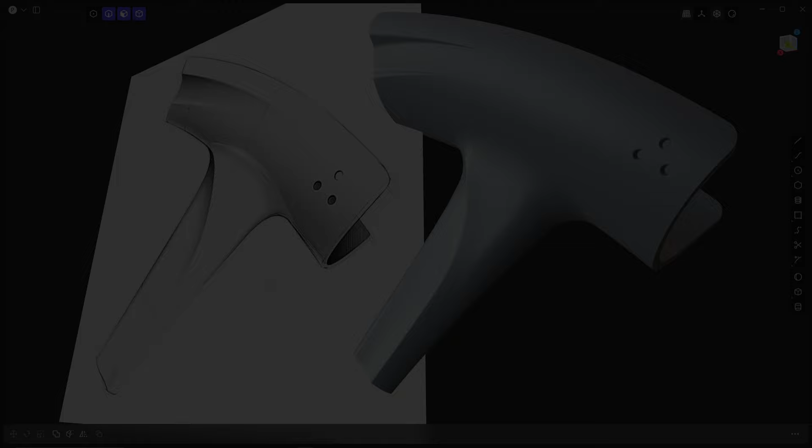Today, we're going to delve into the world of shapes and explore this particularly tricky one. This shape has a wonderfully rounded top that adds a touch of sweetness to its overall appearance. However, things get a bit tricky when we encounter an indentation, which is formed by two hard edges right here. But wait, there's more. We also have a challenging hard edge that starts from this point of tangency and extends all the way down here.

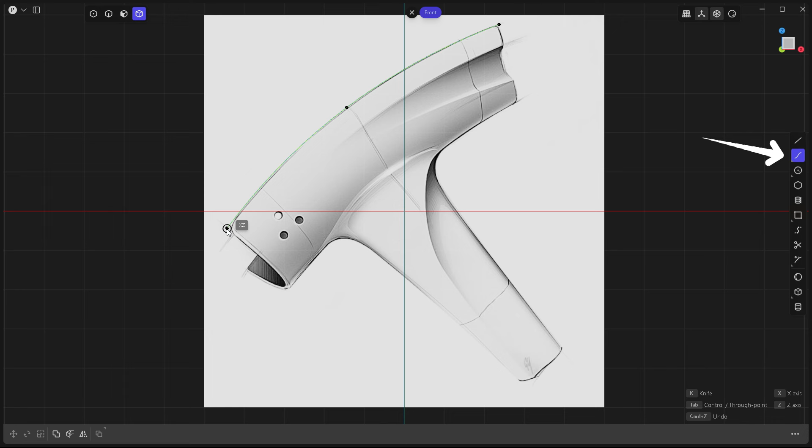This means we're dealing with two different cross sections, one up here and another down here, and they have slightly different shapes. Now that we've set the stage, let's dive right into the nitty-gritty details of this shape. As I always say, let's keep it simple. And by simple, I mean just 3 points to define this curve. Use the Spline curve tool, guys. Right-click to confirm. Don't forget to adjust the points by clicking and dragging them.

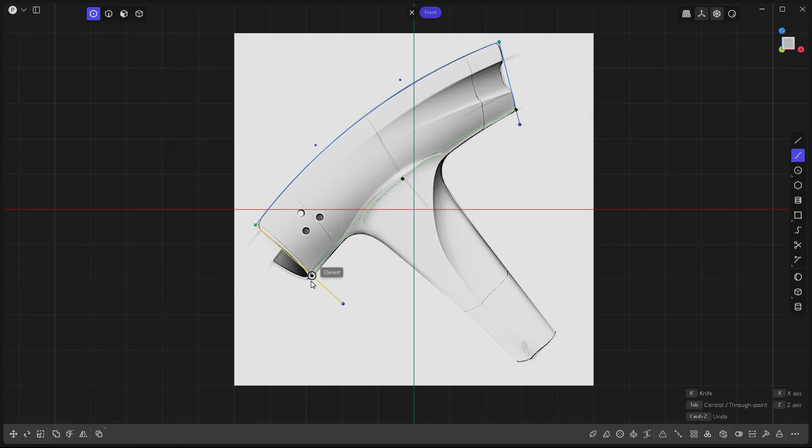To facilitate the creation of the other spline, we can start by drawing two simple lines as guides. Once we have completed the spline, we can then delete these lines. Let's lay down the spline, snap it on the lines. Make sure the spline is aligned with the image. Okay, let's delete these lines.

Alright, let's keep the momentum going. Now, I'll shift the curve at the top 2 units to the left, and then mirror it along the y-axis. To activate the mirror tool, you can either press Alt+X or simply click on the corresponding button in the toolbar. Once that's done, go ahead and click on the green axis.

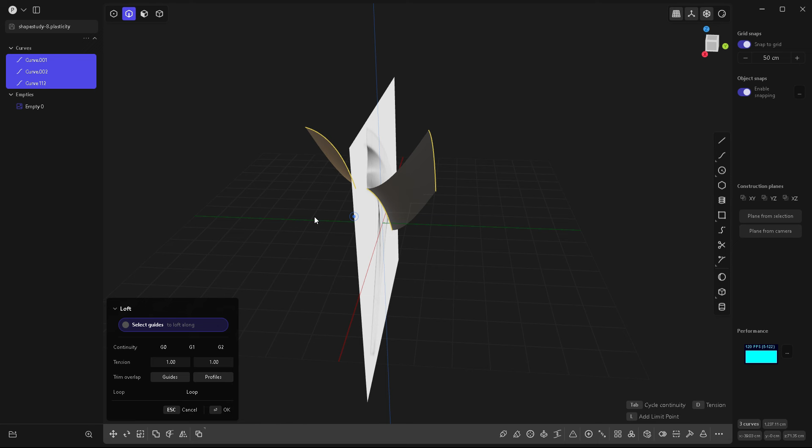Alright, so if you're thinking about selecting the 3 curves and pressing the L key to loft them, I would advise against it. We don't want to end up with this pointy shape. Instead of that, what we really need is tangency on both sides. To achieve that, all we have to do is select the 2 curves at the top, then press the I key and extrude them along the Z-axis.

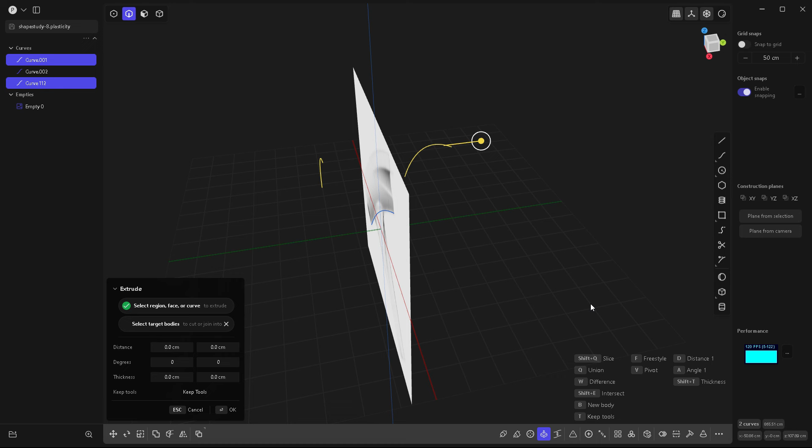To begin, select both curves and press the I key. Next, press the F key to extrude them along any axis that suits your requirements. In this case, I will click on the Z-axis and extrude them slightly. This action ensures that tangency is achieved at the connection points of these 2 curves. You can now remove the curves. Instead, we will utilize the surfaces that have just been created to perform a proper lofting technique with G1 continuity.

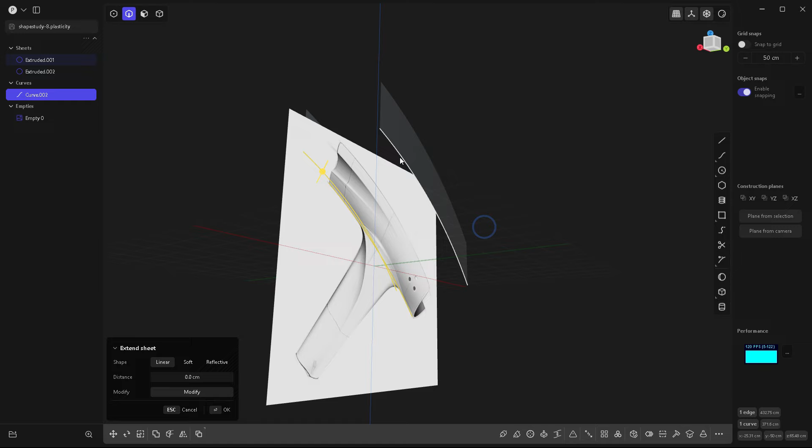Okay, here's what you need to do. First, select this edge, then, with the Shift key pressed, select the curve, and finally pick the edge on the opposite side. Once you've done that, simply press the L key. This is something else, guys, right?

Now, we need to split the spline at the points of tangency. These 2 points here. Grab the Split Curve tool and click on both points. Make the cut exactly where the sketch intersects the curve. Next, press Alt+J to unjoin the curves. You can now delete the curve in the middle.

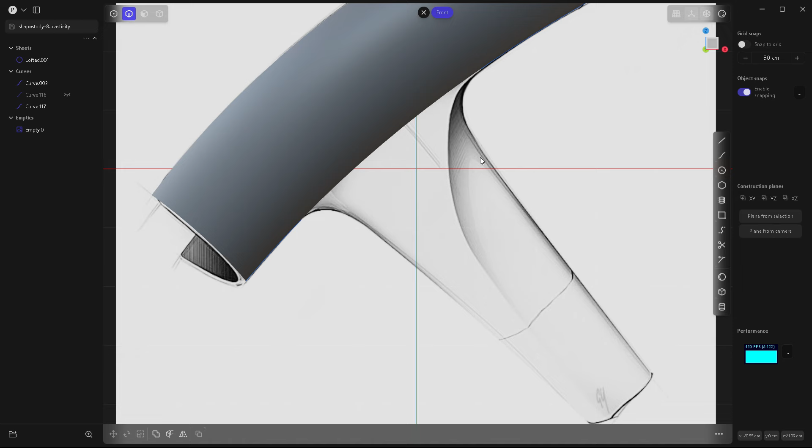Alright, now let's move on to the next step, which involves establishing tangency between these 2 points and the other 2 points on the opposite side. There are 2 methods we can use for this. The first one is to utilize the tangent circle tool. Alternatively, we can select the 2 points and press the L key, then set the start curve and end curve to G1. So to start off, let's create a spline here and one on the opposite side.

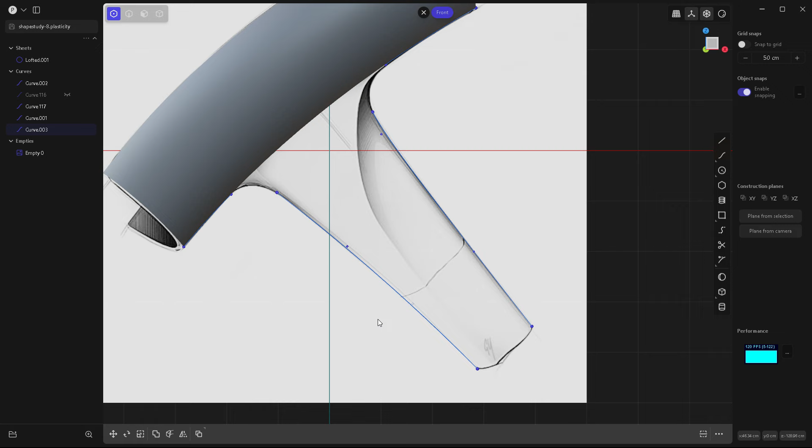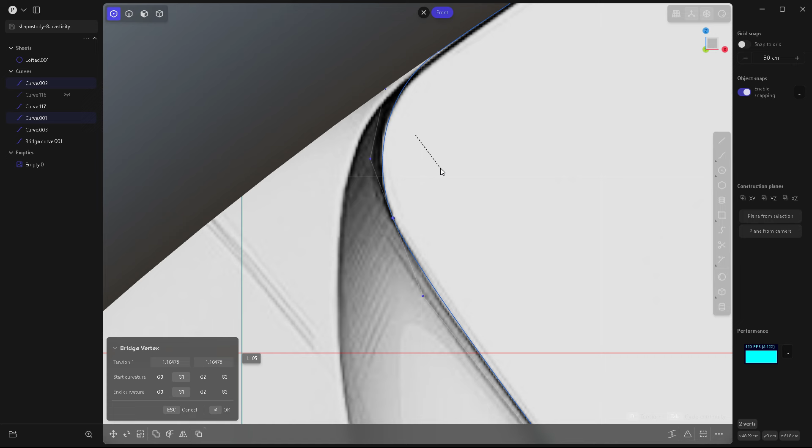I could even use the bridge curve tool, guys, but let's simply select the points and hit L on the keyboard. This action makes sure that tangency is achieved at the connection points. You can now select the curves and press the J key to join them.

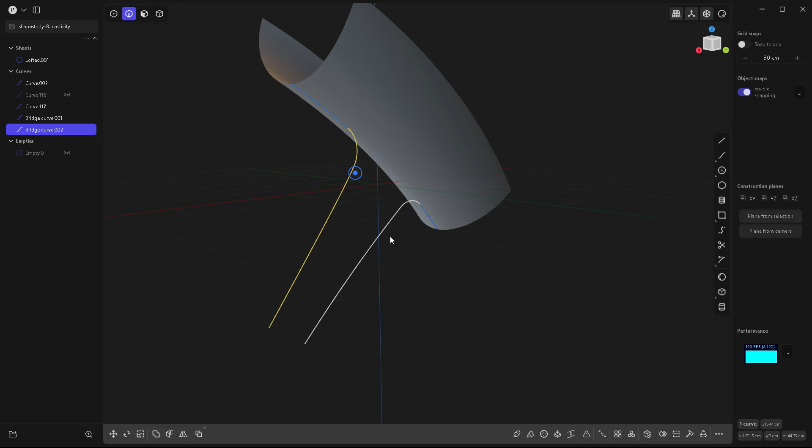To create an arc that snaps on the points of tangency, we will use the 3 points arc tool. Before we proceed, let's right-click on the material icon and select Show Faces. This will allow us to visualize the wireframe, giving us a transparent view.

Let's create this arc. To create a 3-point arc, simply hold down the left mouse button here. From the list of options, choose 3 points arc. This tool requires you to select 3 points. Start with the first point, like this. Then, choose the second point to define the diameter. Finally, select the third point.

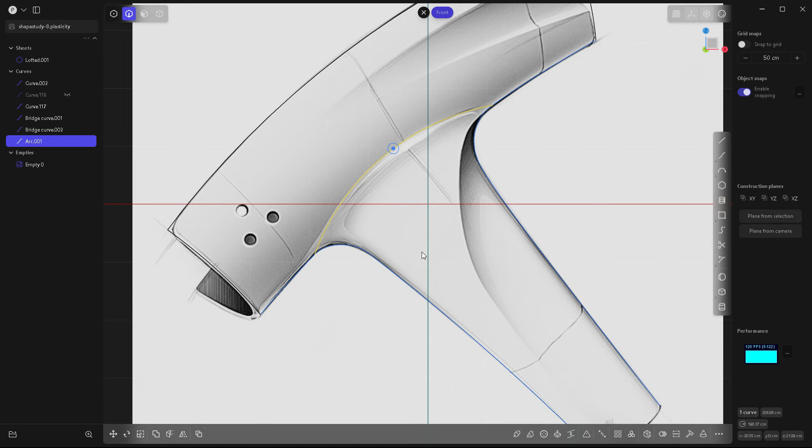OK, click on Show Faces again. To utilize the newly created arc, just press the C key. This will bring up the requester, which is searching for a target model to cut. All you have to do is select your model, right-click to confirm, and delete the cut section.

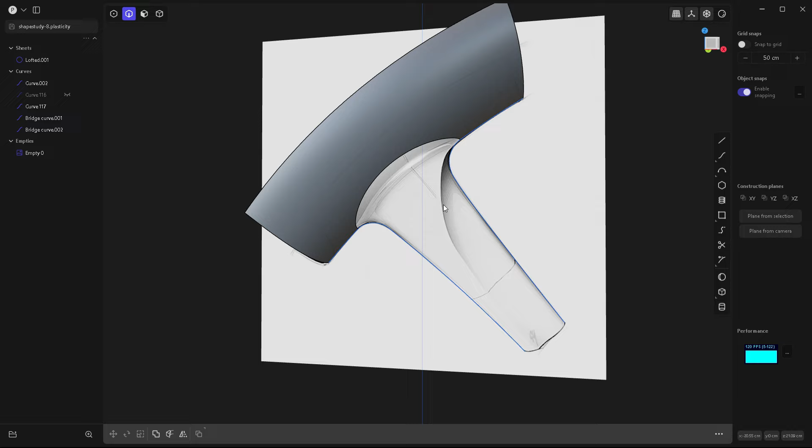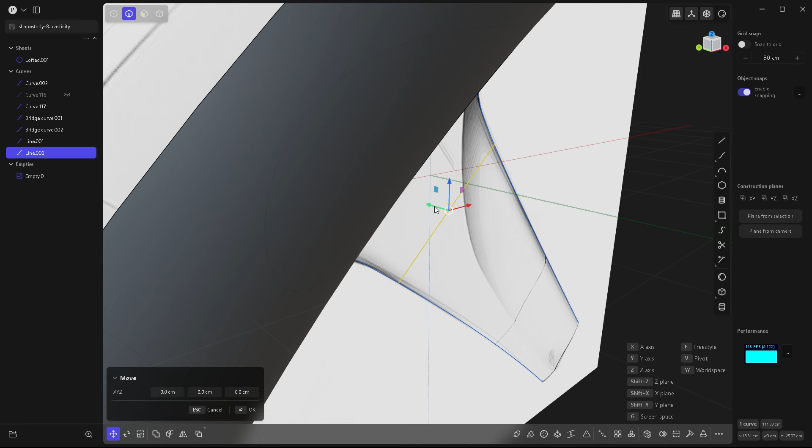Alright, now I'm going to create a plane where I can sketch my cross-section using the technique we've learned in the previous tutorials. We just need to create a line intersecting the 2 splines. Next, press Shift plus D to duplicate it, move it a bit to the right, and mirror it. Finally, select both lines and press L key to loft between them.

Let's create a simple oval using the 2-point circle. Sorry, a simple circle, but the shape we will end up with is more like a capsule. Then, with the line tool, create two tangent lines. Hover over the curve till the tangency snap appears on the screen, then right-click to confirm.

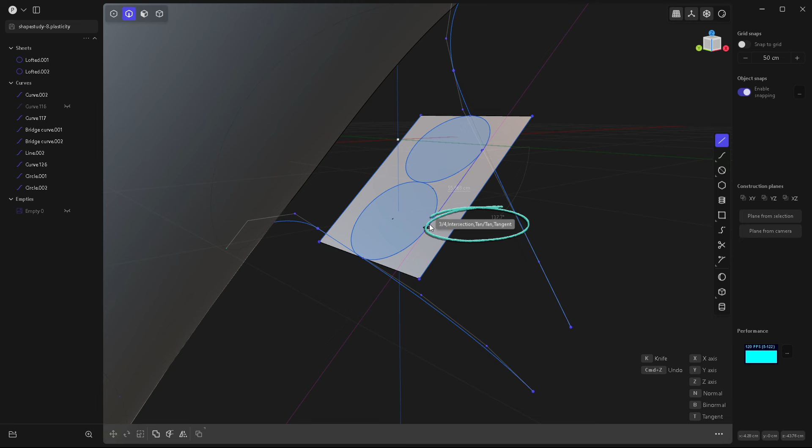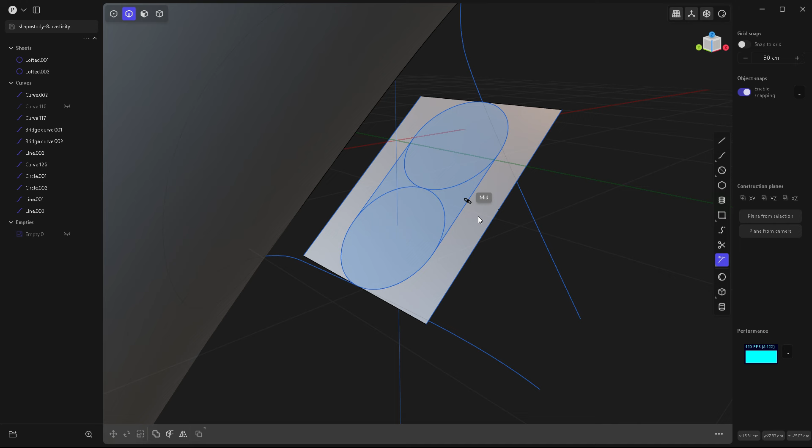If you want to split the circles at the points of tangency, one option is to utilize the Split Curve tool. After selecting this tool, you can left-click on the points of tangency and press the Alt+J key to unjoin the circles. Another option is to use the Trim tool, which allows you to remove unwanted parts of the circles. To do this, click on the Trim tool, then simply hover over the circles and left-click on the areas you wish to delete. Now select the curves and press J to join them.

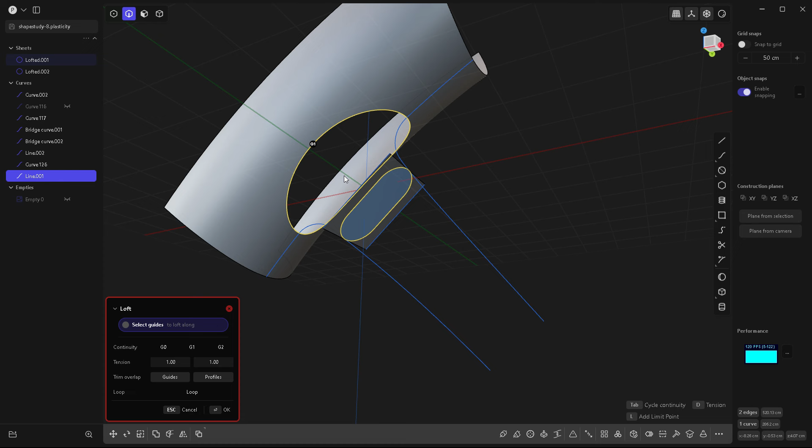If you try to select the upper edge and the newly created section and then press the L key, you'll be disappointed. The Loft tool can't handle the complexity of the edge. But don't worry, there's a solution. We just need to give Plasticity some extra information and let it know which direction we want the surface to go in. To achieve that, press Ctrl+R key.

This will activate the Isoparam tool. Press the Tab key to switch between horizontal or vertical. Snap the new edge right in the middle by hovering over the edge at the top, and left mouse click. We can delete the plane and curves too.

Grab the Line tool and create a line similar to this one. Start from the middle of the section and extend it all the way down in the binormal direction. The binormal vector is a special vector that is perpendicular to both the tangent vector and the normal vector.

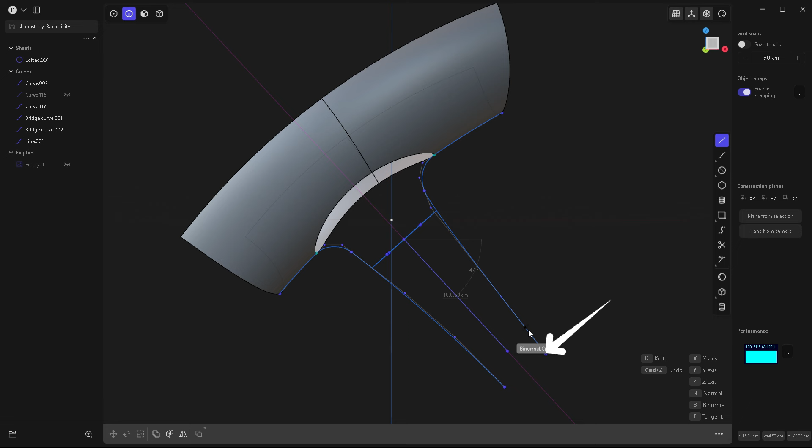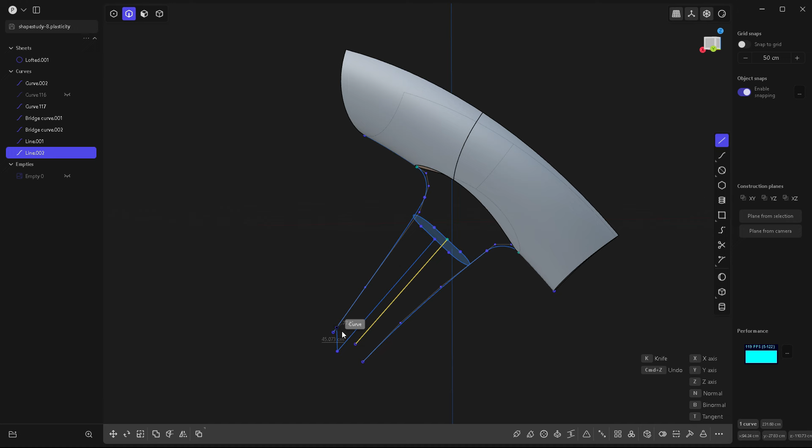To snap exactly at this point, hold down the Shift key and hover over the adjacent line. Then, go down to this point and left-click on it. Finally, right-click to confirm. Do the same on the opposite side. Make sure the points are greenish, guys. This tells you that the connection is perfect.

Let's now select both edges and press Shift+D to generate curves out of edges. Now let's move on to the next step where we will connect this point to the one above it, following the rule of tangency, alright?

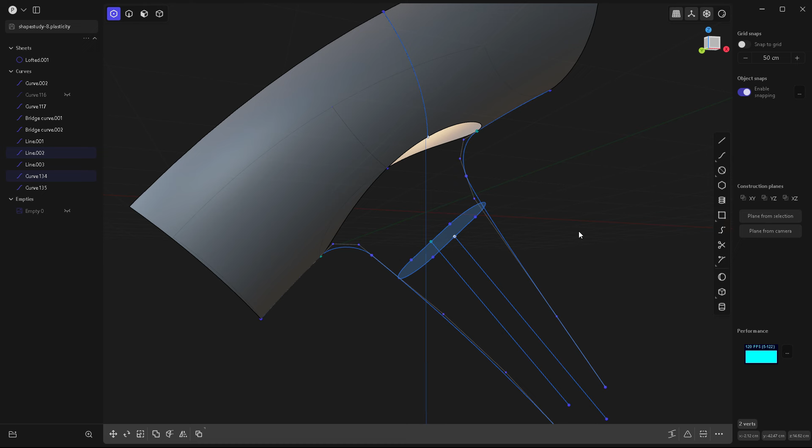Now grab the Spline tool and create a simple curve at the bottom. It's a temporary solution. Make sure to close the curve accurately. Creating another one in the middle might be necessary.

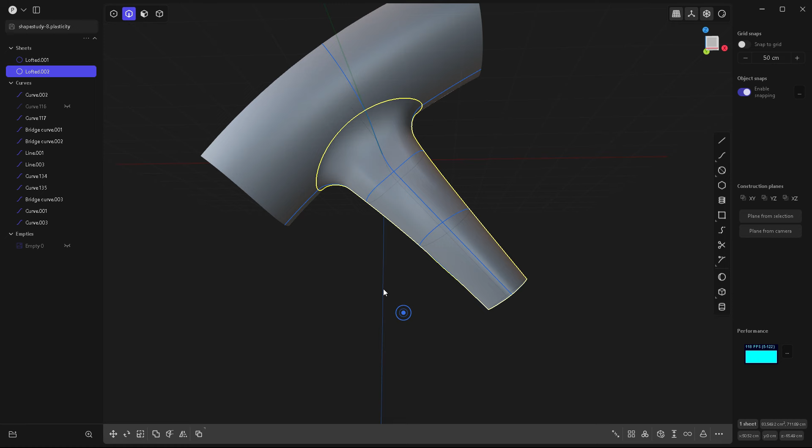To tackle the challenging middle section, we'll begin by using the Control Point Curve tool. Lay down a curve, ensuring that the second point is tangent to the first one. Start by placing the first point right here. Then, snap onto the purple tangent line and position the second point. This is how you achieve tangency in this particular point.

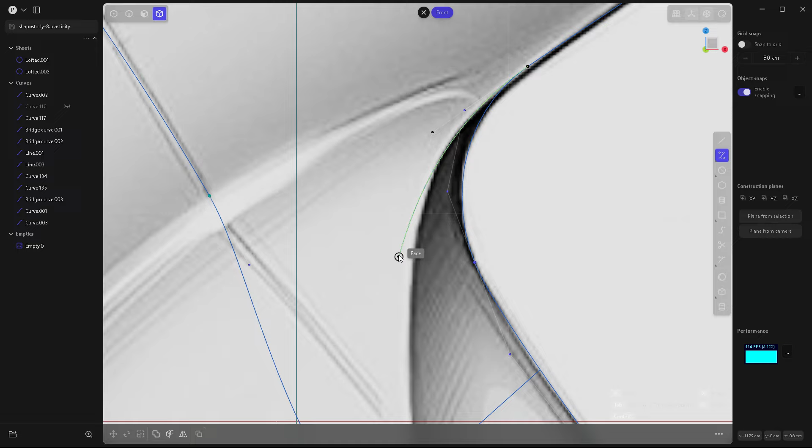To continue, just keep placing control points. Aim for maximum precision here.

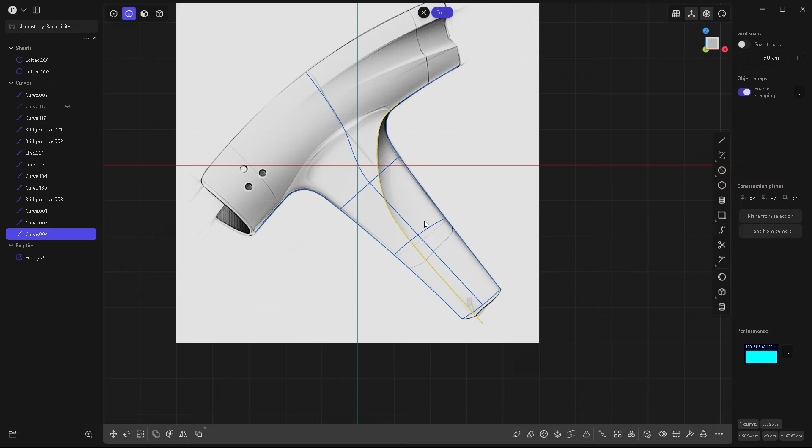Now with the curve selected, press the C key. Next, select the model to cut it. Delete the part that you don't need, this one. You can now delete the section at the bottom.

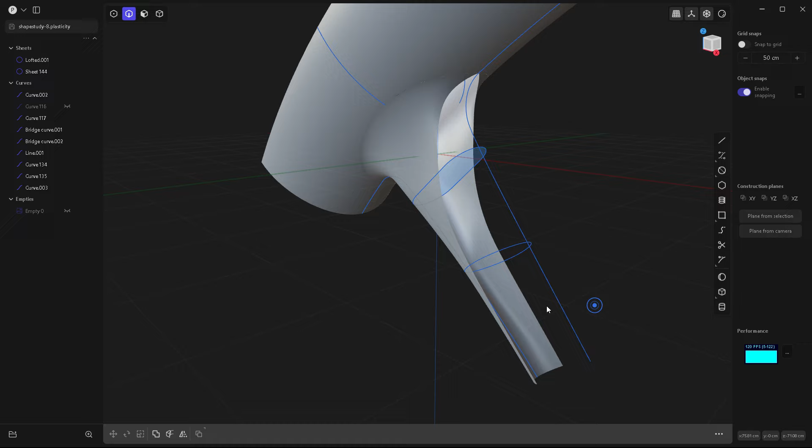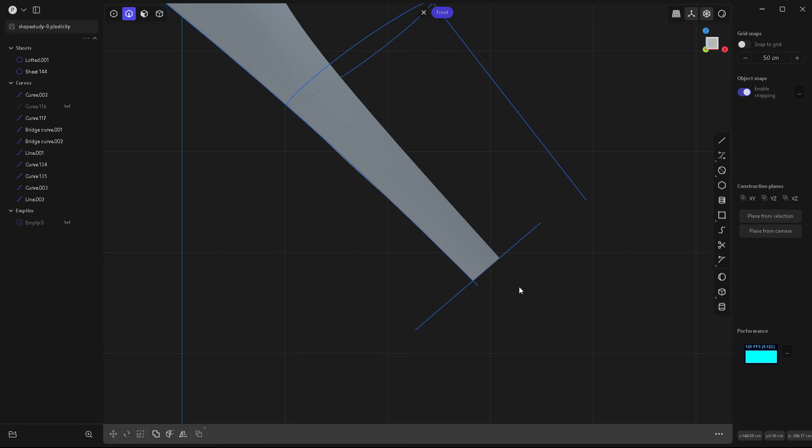And the two guides as well. There may be some issues that arise from these fragmented edges. However, I have a solution. I will simply cut it with a clean, straight line. By taking this action, we can achieve a nice, seamless, single edge. There we have it.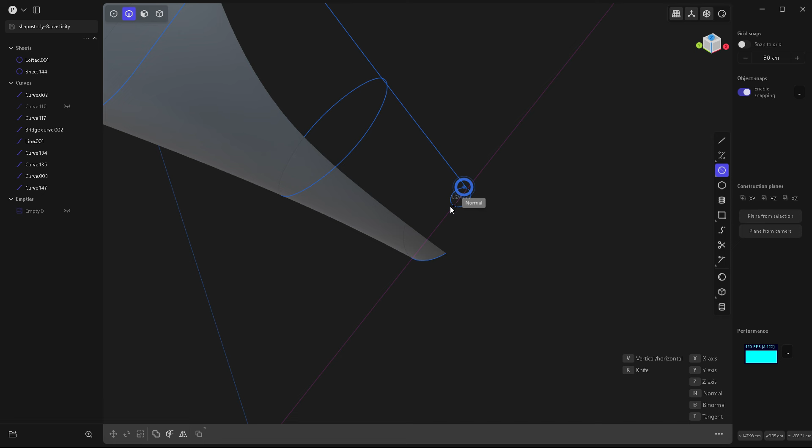Now press Shift plus D to generate a curve. Next, grab the 2-point circle and create one, like this. Snap your mouse cursor along the purple normal direction. To divide the circle in the middle, simply use the line tool. Once that's done, you can easily get rid of half of the circle by using the trim tool.

To achieve a seamless transition between the points, it is important to have G1 at this connection and G0 at the other. This is necessary in order to maintain the desired hard edge at this connection. That's the shape you should get. Select them and press the J key.

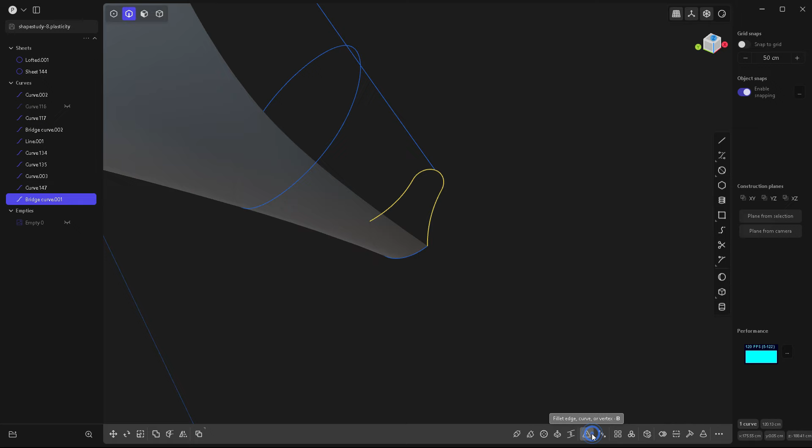Alright, let's go ahead and select the edges and then press Shift plus D to create the curves. I will not loft using the edges, as I'm not interested in achieving tangency in this case. Remember, we need to have G0 here. Don't worry, we can always bevel these edges later on.

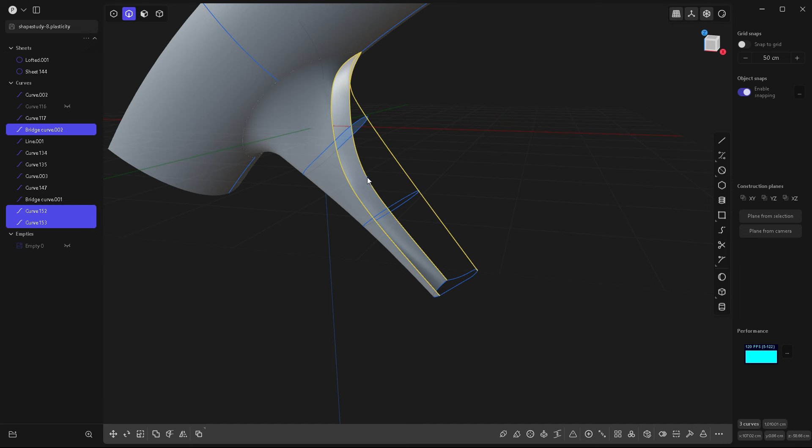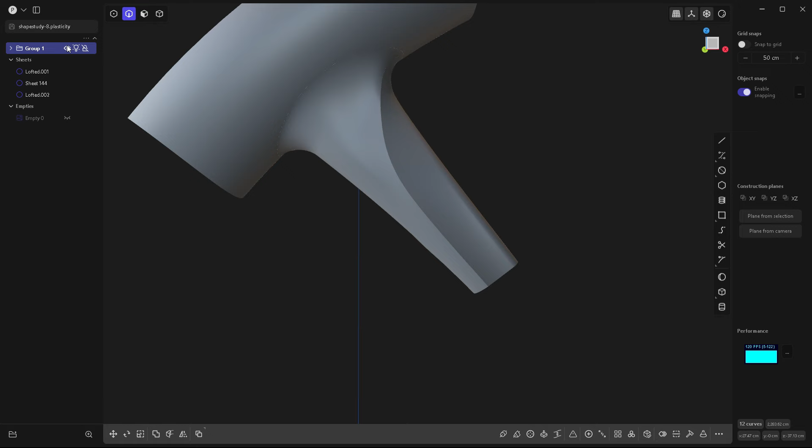Now select the curves in a clockwise or counterclockwise circle and press L. Finally, hold down the Shift key and pick the shape at the bottom, and there we have it. Lovely. Let's do a little bit of housekeeping by grouping all the curves in a folder by pressing Ctrl plus G. I feel like the need to trim the bottom, don't you? Well, grab the line tool and let's do that.

Now, let's move on to the next challenge, dealing with the indentation. To accomplish this, I will be using 2 splines and imprinting them onto the surface using the imprint command.

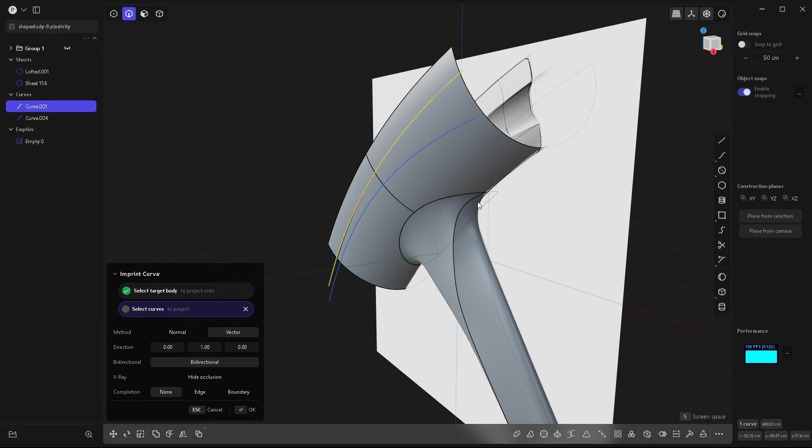Move the splines away from the center in the perspective view. Then imprint them onto the model, one by one. To find the imprint command, press the F key and type imprint in the input text field. To recap, select the spline, invoke the imprint command, and then select the model, and right-click to confirm. Okay, get rid of the splines.

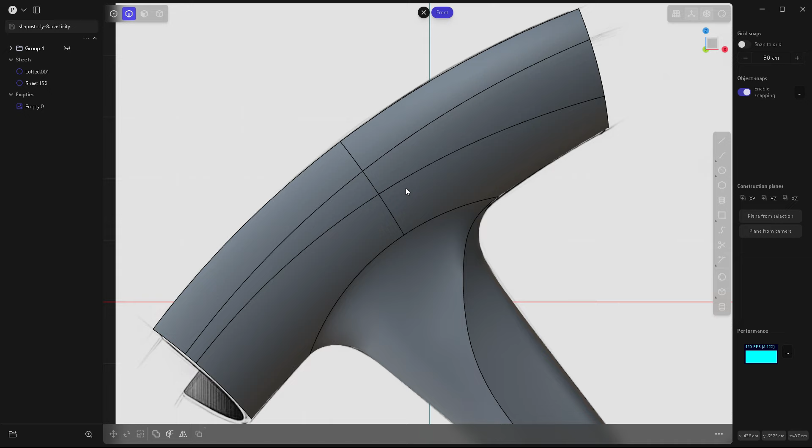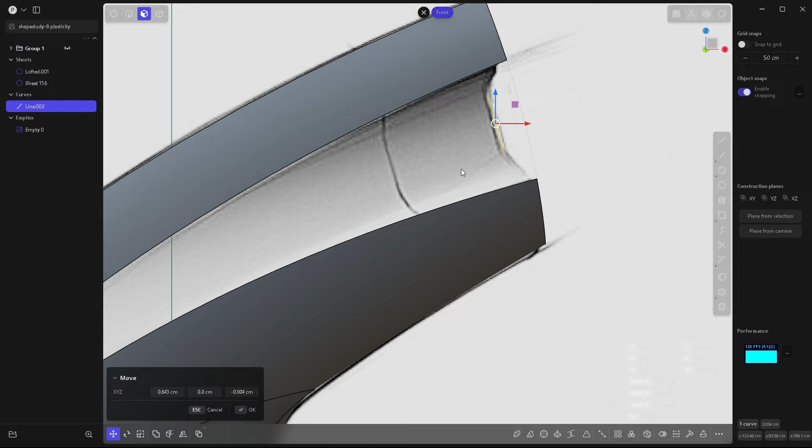Moving on, deleting this face. Next, let's create a tiny curve like this. Move it to the left and place it as close as possible to our surface. We will have to rotate it a bit and do a bit of guessing work just like that. You can rotate it, however, don't move it.

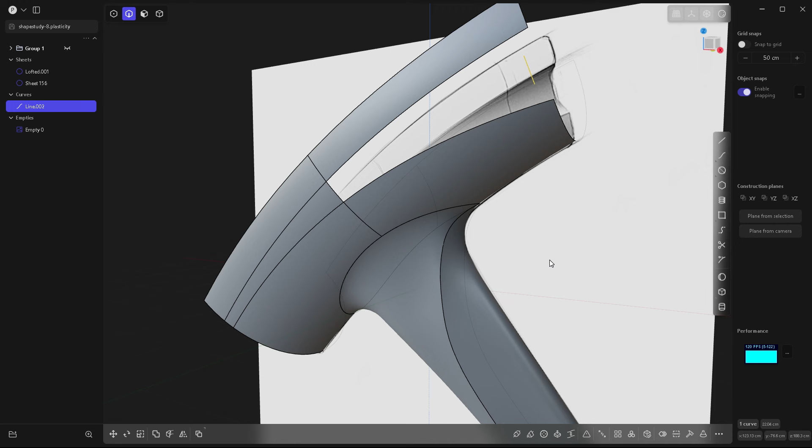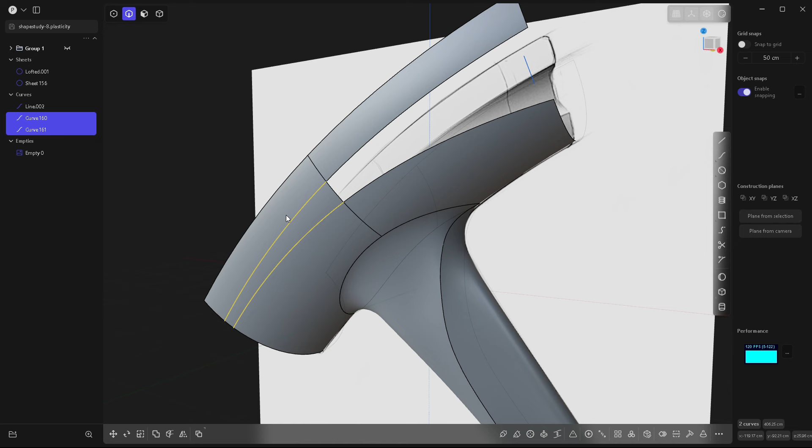To proceed, we need to connect these 4 points. This will allow us to achieve G1 tangency at these 2 points, while maintaining G0 at the other 2. Let's select both edges and press Shift+D. This will provide us with curves. First, select all 3 curves and isolate them. Then, simply loft between the control points. Make sure to set G1 continuity on the left and G0 on the right.

Now loft between the edge and the tiny curve. This will give us G1. Hold down the Shift key and pick up the guides. And there you have it. Now I can decide whether to use G1 or G0. It doesn't really matter, guys, because I'm going to bevel these edges. So we can just keep it at G0.

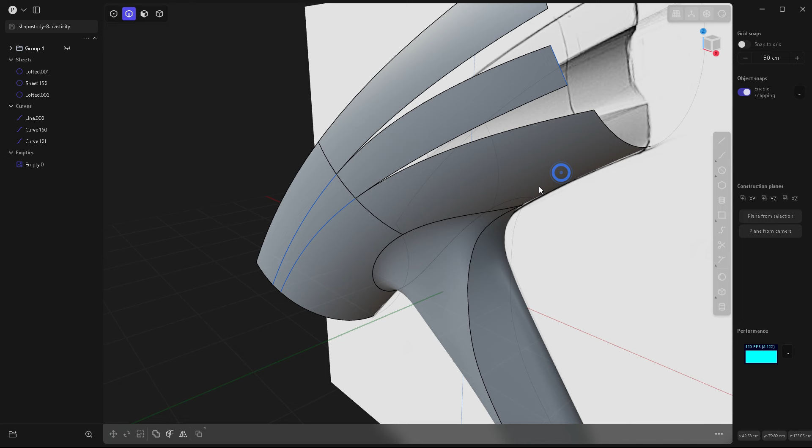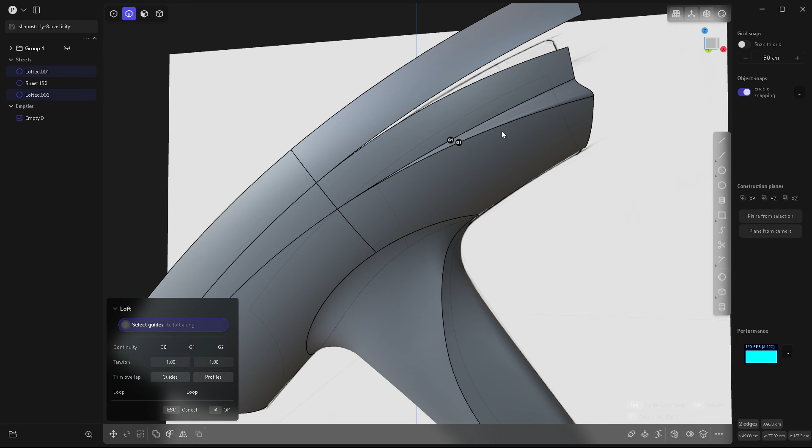Delete the curves and loft between the edges. As you can observe, Plasticity is giving G1. However, at this point, I'm not really a fan of how the edges blend in. To ensure a smooth transition between points, I will now demonstrate how you can effectively make those points flow seamlessly. Let's set it to G0. By following this approach, we will arrive at a series of interconnected points. Consequently, we won't be able to fillet the edges properly. Select the newly created sheets and press the J key to join them all.

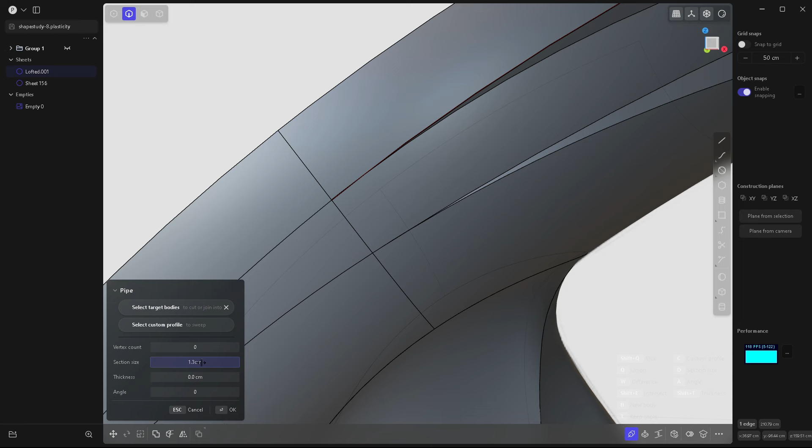I've been recently asked, how do you fillet those edges? Well, I set it to G0 just to answer that question. There are a few ways to do that. You can achieve it using the pipe tool. Select the edge, as shown in the video. Then press the P key, type 1.3 centimeters in the input text. Before confirming the operation, press the B key. This will give you a standalone pipe.

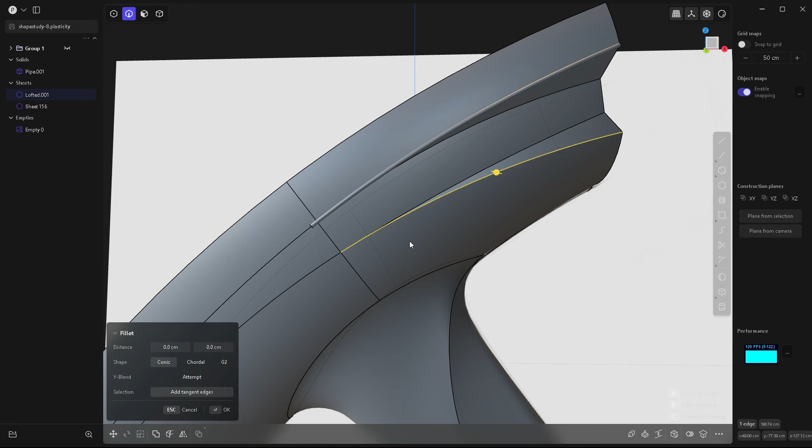Next, select this face and move it a bit, to prevent any confusion or congestion at the intersection. You have to do the same with the other side of the pipe, but let's go ahead without doing it, just to show you what's going to happen. Okay, let's get the other pipe. Give it the same diameter, and press the B key.

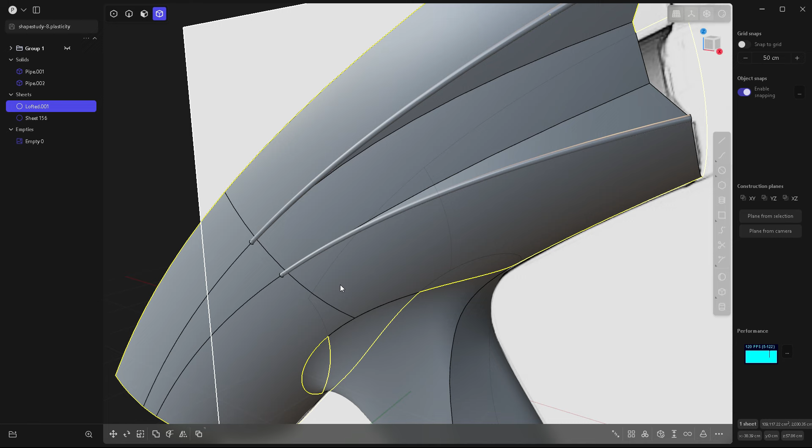Moving on, subtracting the pipes using the Boolean tool. First select the model, next press the Q key, and then select the pipes by holding down the Shift key. And there we have it. Okay, now you can see the issue right here. I should have moved this face of the pipe as well. Okay guys, let's undo that.

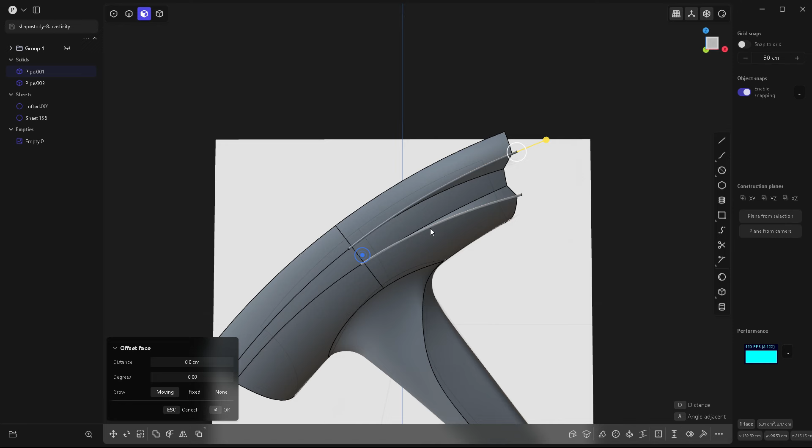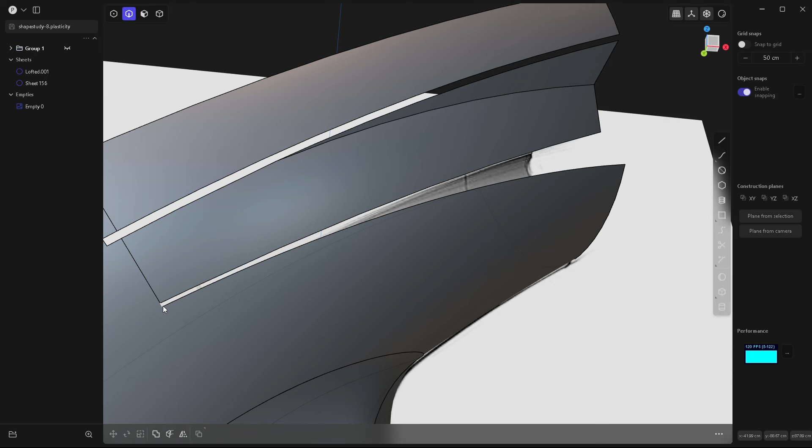This time I will move the face to the right side. This will make sure that the pipe cuts the sheets correctly. Well guys, I guess I should just delete that face too. To ensure the loft tool works properly, select and delete the broken edge, leaving us with a single edge. You can now loft between the edges. You also want to hold down the Shift key and pick this tiny edge to ensure G1 tangency.

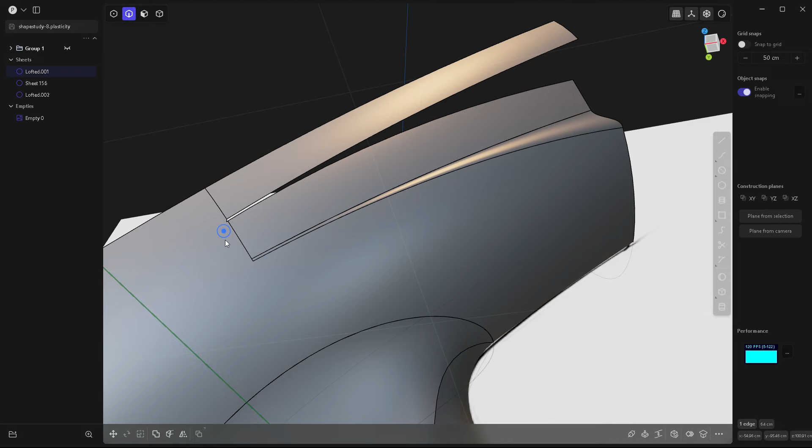I could have easily completed this task within seconds, my friends. However, I want to take this opportunity to demonstrate why the loft tool often generates errors. Let's do the same work up here. The transition is now much better. Select the sheets and press the J key to join them. To complete the next step, you need to patch the bottom of the shape. This can be easily done using the patch tool, which is conveniently located right here.

Alright, it's time to mirror the shape. Press Alt plus X key and click on the green handle, then click on Merge Halves Together. This action will merge both shapes into a single shape. Let's loft these edges and set them to G0.

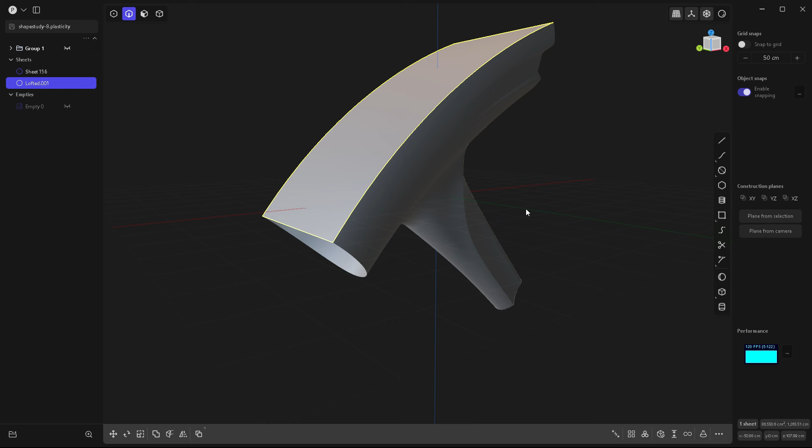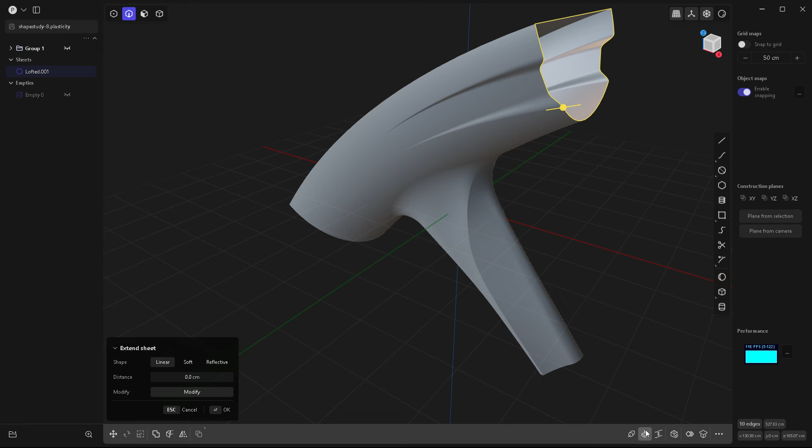We're almost done, everyone. Let's patch the front part and the back as well. If the patch tool doesn't work, you can attempt to cut a slice of the shape and try again. Create a line and cut through it by pressing the C key. And voila, there it is.

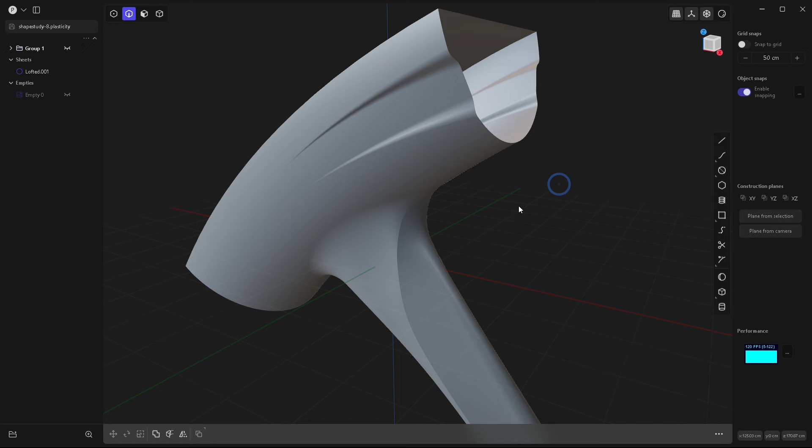To complete the process, we will utilize the Hollow Solid tool. Start by selecting the desired faces and then click on Hollow Solid. After that, simply click and drag the yellow handle until you are satisfied with the result. Okay, let's keep it at that.

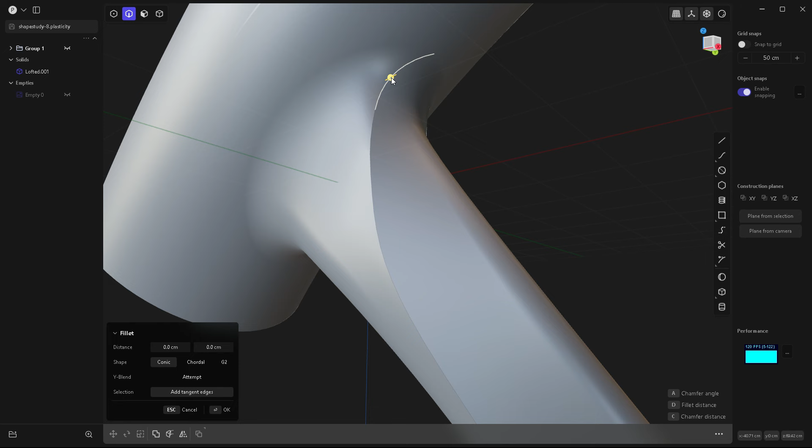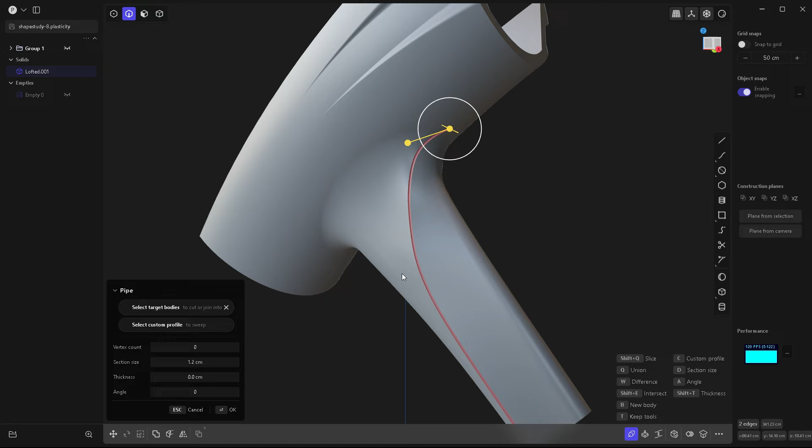One more thing we can do is bevel these two edges. I'll be using the same technique as before. Select the edges, press the P key, and type 1.2 centimeters in the input field. Confirming the operation is as easy as a right click. The Boolean tool will be automatically recalled for you.

Now here's something important to keep in mind. When using the pipe tool for this task, you'll need to have sheets. However, if you're working with solids, like in this particular case, you'll have to delete all the faces that are created by the Boolean operation. Makes sense, right?

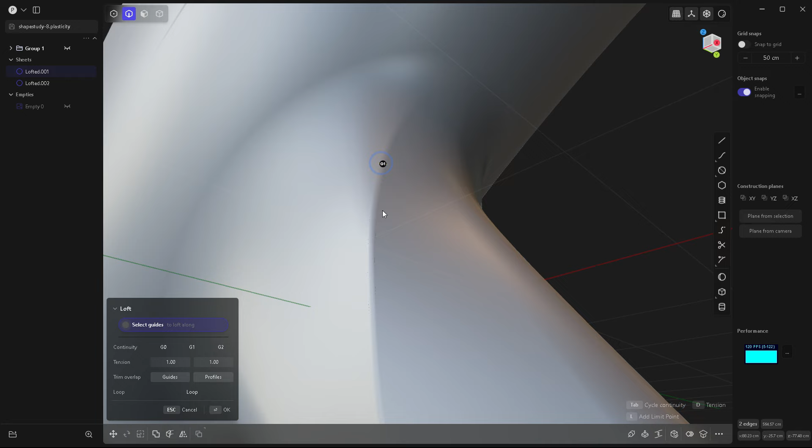Now select these edges and loft them, and make sure you press Shift and left click on that tiny edge to ensure G1 continuity across the newly created surface. There we have it. Let's mirror it again. Don't forget to click on Merge Halves Together.

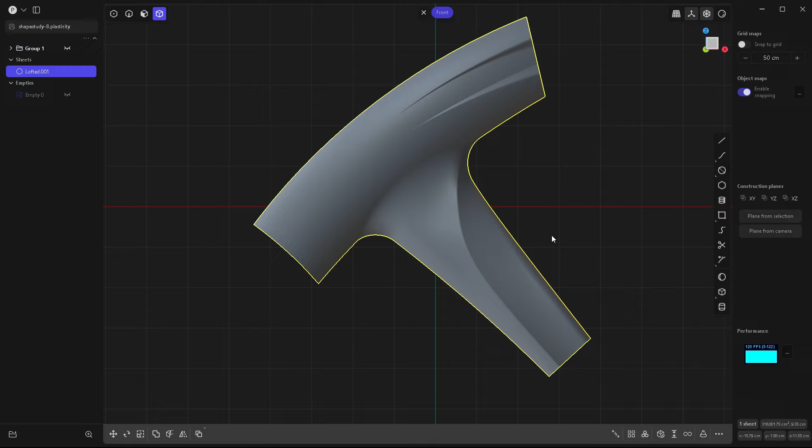All right, folks, we've reached the final step. Now, let's grab the circle tool and create 3 circles. It's as simple as that. You might be wondering, why 3 circles? Well, I'm glad you asked. The reason is to introduce you to a handy little tool called Dimension Tool. I'll be creating 3 circles, each with a different diameter. But how do we make them all have the same diameter? Well, that's where the Dimension Tool comes in.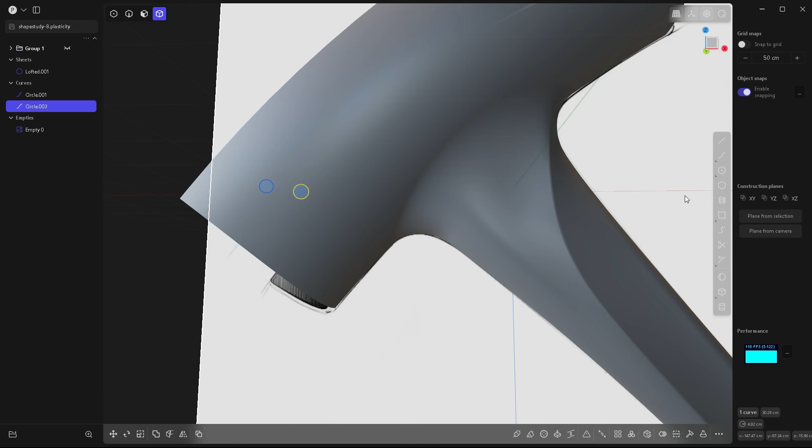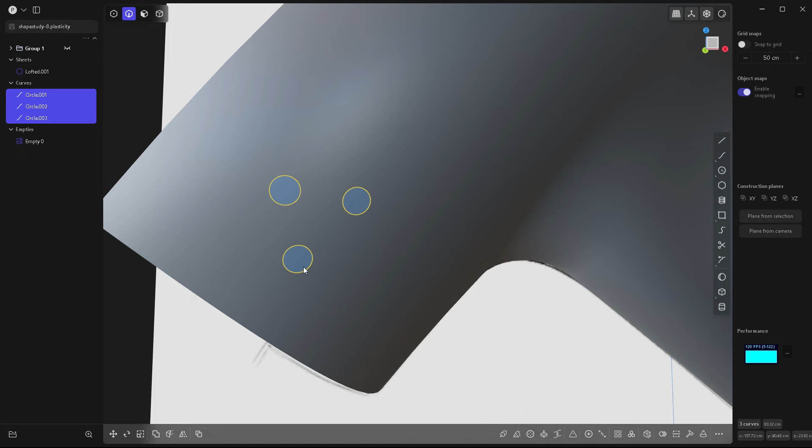Just select the circles, then press the F key to open up the command palette. Type Dimension and click on it. Then, click in the viewport. As you can see, the circles are now the same size. This little trick can really come in handy, guys. Now, with the circles selected, imprint them on the surface. You can now delete them.

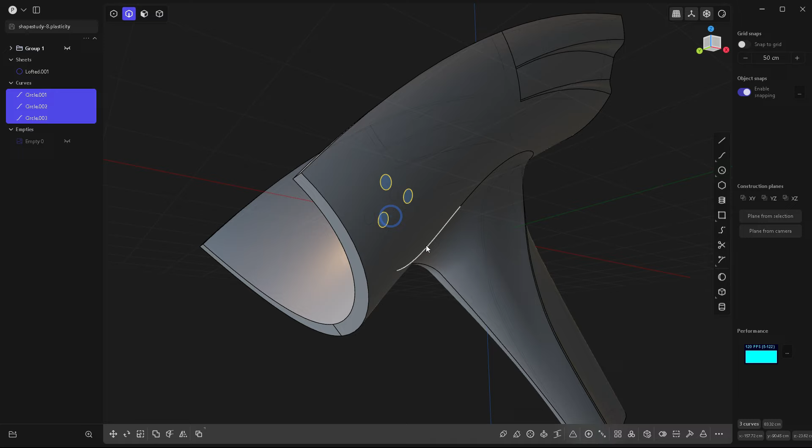Next, select the 3 faces and pull them in. Give them a little fillet, just like that. Let's fillet these edges too. All right, there we have it. The last mirror, guys.

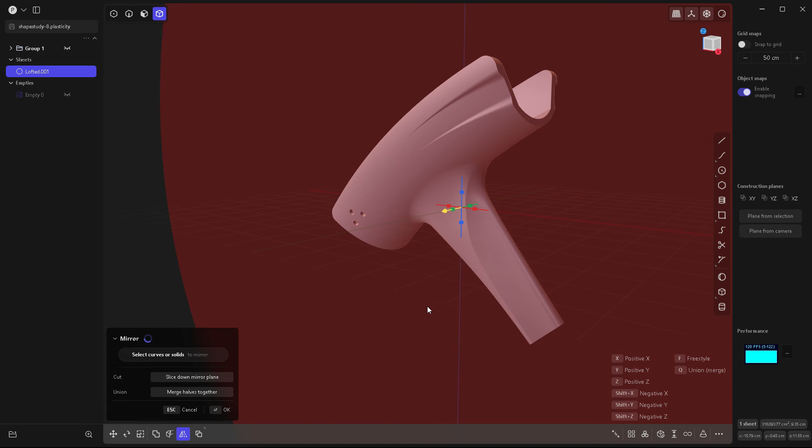Okay, let's have a look at the reference. Look at that. I'm quite happy with that, guys. I hope you found this tutorial helpful and were able to grasp something new.